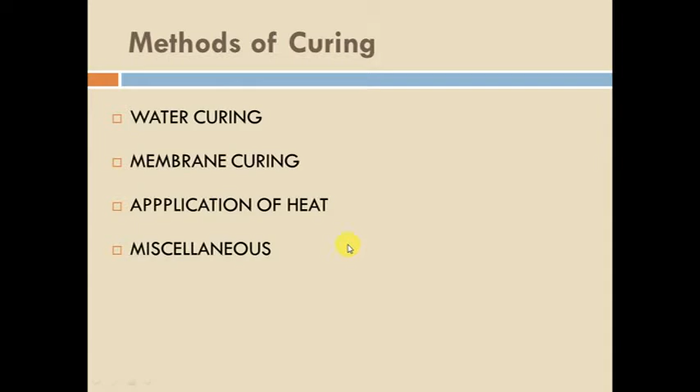Based on the required site condition, we can adopt these kinds of curing in order to get the complete hydration of cement. So first we'll go with water curing.

Water curing is one of the best methods of curing because it satisfies all the requirements like progressive hydration, maintaining the required temperature, and removing of shrinkage cracks or other cracks. Since it satisfies all these requirements - promotion of hydration, elimination of shrinkage cracks, and absorption of heat of hydration - water curing is the best method of curing.

Even if you are adopting membrane curing, before placing the membrane on top of the concrete surface, we have to do water curing also. Water curing is done initially, then on top of that, we cover the concrete with the membrane. So even if you adopt membrane curing, initially you have to do water curing, then you can do the membrane curing.

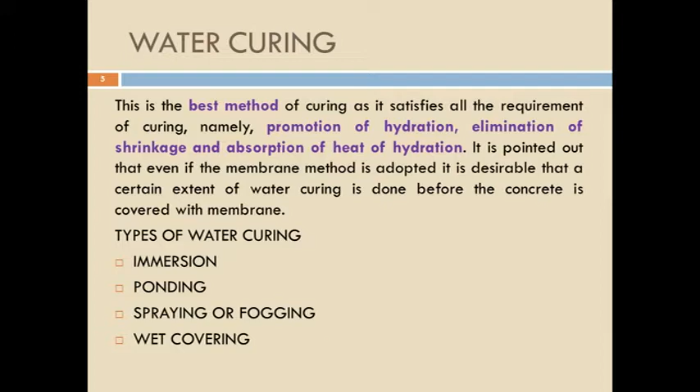These kinds of immersion tanks can be used for laboratory purposes. You can see these temporary or permanent immersion tanks in laboratories or in RMC plants, where we are placing precast concrete items and concrete cubes, beams, cylinders, etc.

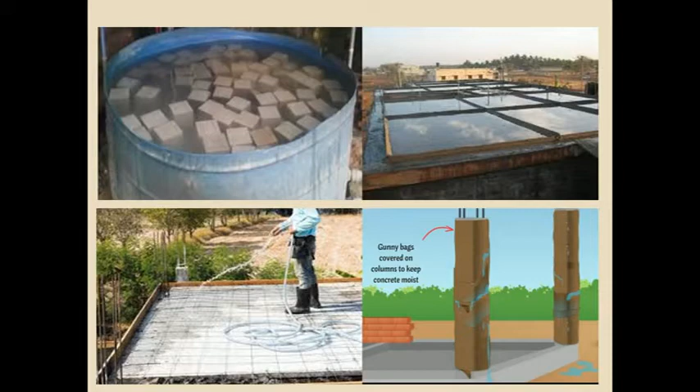Water curing of concrete.

Water curing is the best method of curing as it fulfills all the requirements of curing, such as hydration of cement, elimination of shrinkage, and absorption of the heat of hydration.

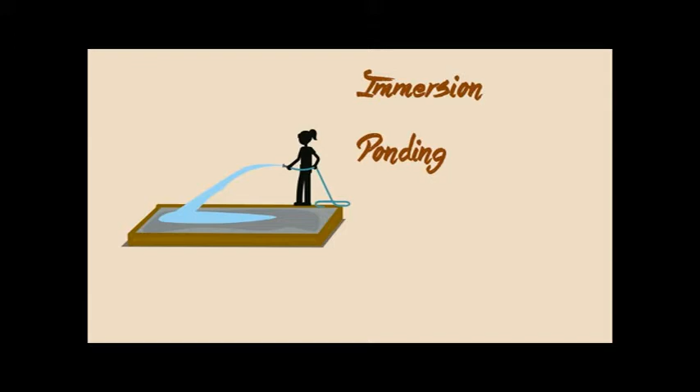Water curing is generally done in different ways, such as immersion, ponding, spraying or fogging, and wet covering. The type of water curing is adopted based on the requirements of concrete.

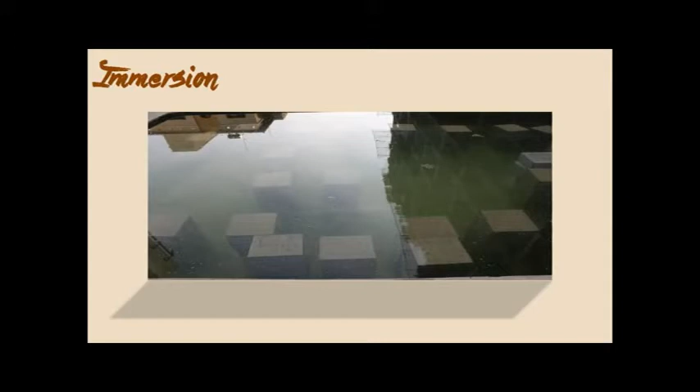Precast concrete items are typically immersed in curing tanks for a certain duration. Ponding is adopted for pavement slabs, roof slabs, etc. Spraying or fogging is done on vertical retaining walls, plastered surfaces, or concrete columns, etc.

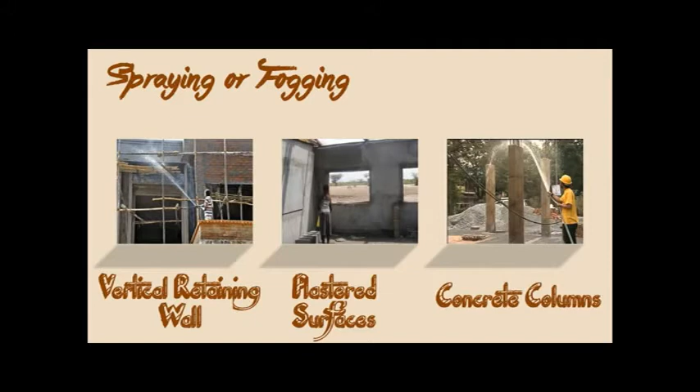In some cases, wet coverings such as wet gunny bags, hessian cloth, jute matting, straw, etc., are wrapped to a vertical surface for keeping the concrete wet. Apart from these, for horizontal surfaces, sawdust, earth or sand are also used as wet covering to keep the concrete in wet condition for a longer time so that the concrete is not unduly dried, to prevent dehydration.

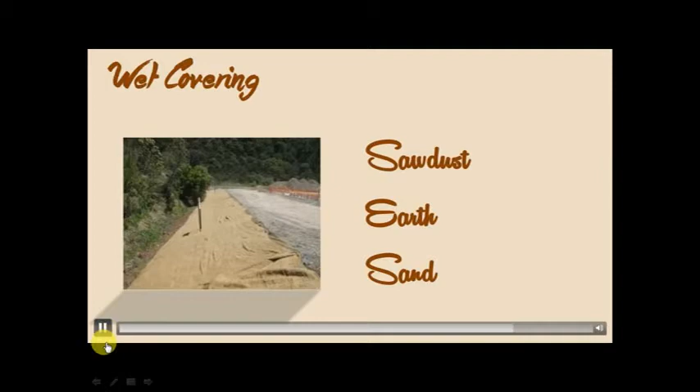These are all the methods adopted for water curing. I hope we understood about water curing and its different methods.

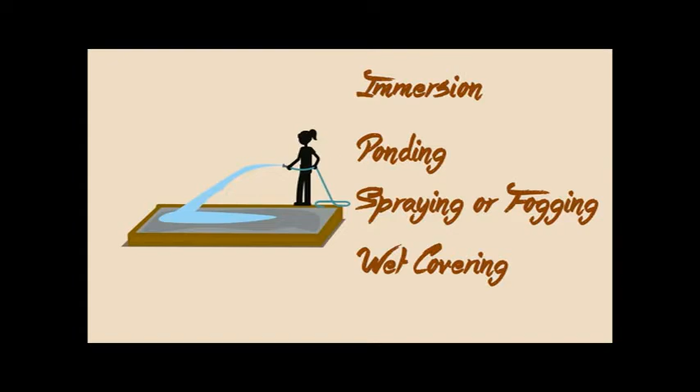Next we'll go into membrane curing. Membrane curing is usually done at a place where there is a shortage of water, or where curing is not possible due to the application of water. If there is any shortage where curing is not possible, in that case we can adopt membrane curing.

Curing is not only application of water to the concrete surface. There is a technical reason behind doing the curing. In order to create uninterrupted and progressive hydration, so that cement particles get completely hydrated, we have to do the curing process. We should not stop the curing process before the cement particles get hydrated.

Stopping curing too early leads to decrease in strength and durability. We should make sure there is no interruption in the hydration, and that hydration continues till all cement particles get hydrated. It is not only application of water - there is a technical reason behind this.

For this reason, concrete could be covered with a membrane, which will effectively seal off the evaporation from the concrete. This membrane is covered on top of the concrete surface so that it effectively stops the evaporation of water from the concrete.

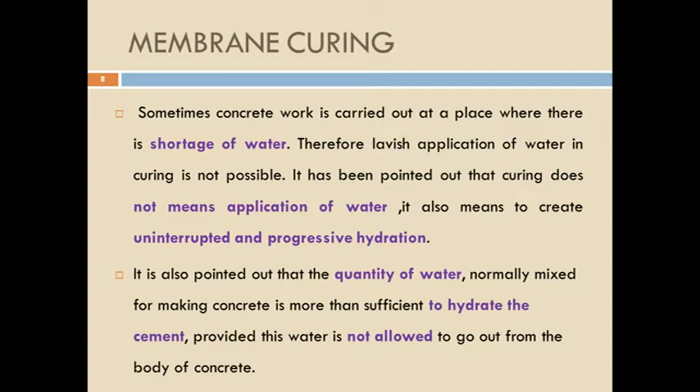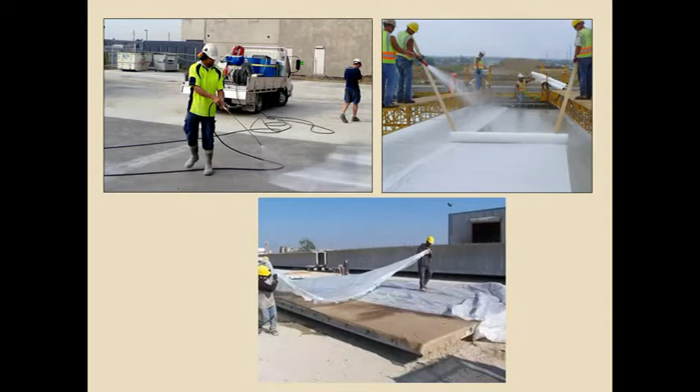Membrane curing of concrete.

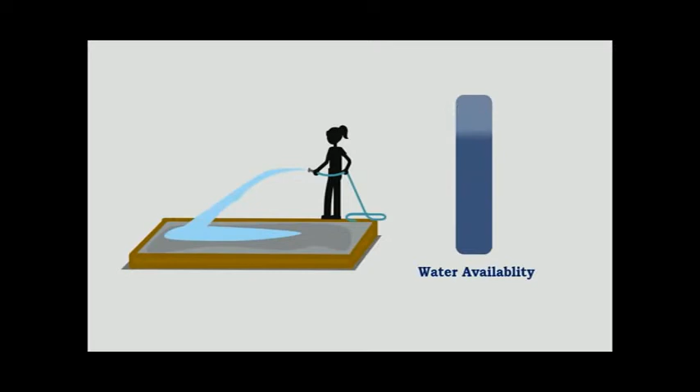In some places where there is an acute shortage of water, water curing may not be possible for reasons of economy.

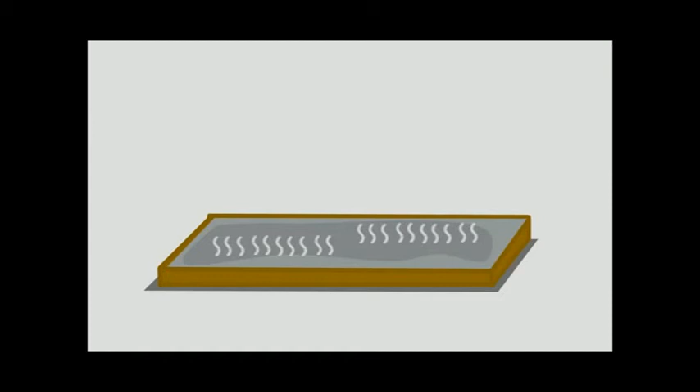We know that curing of concrete is done as water added in the concrete gets evaporated after being placed. If water curing is not possible, covering with a membrane will effectively seal off the evaporation of water from concrete. However, a small amount of water is sprayed before covering with the membrane.

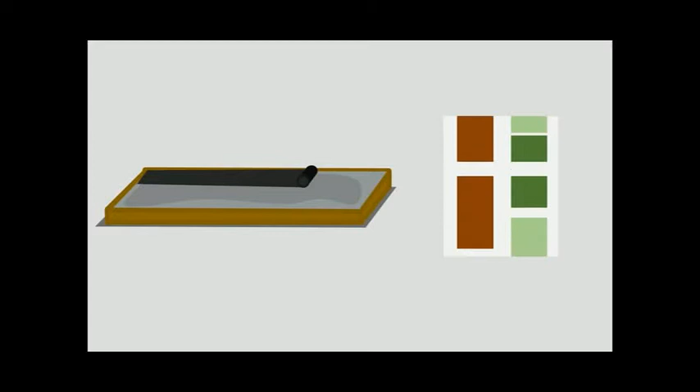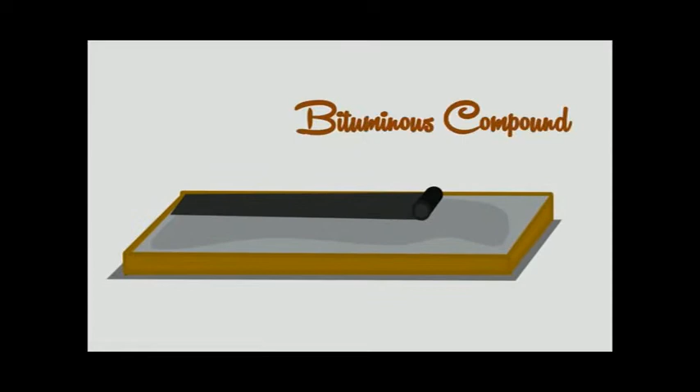There are a large number of sealing compounds developed in recent years. Some common materials used are bituminous compounds, polyethylene or polyester film, waterproof paper, rubber compounds, etc. Initially, bituminous compound was being used for this purpose.

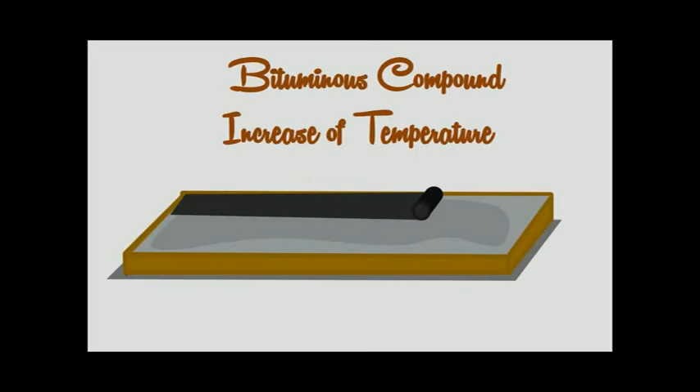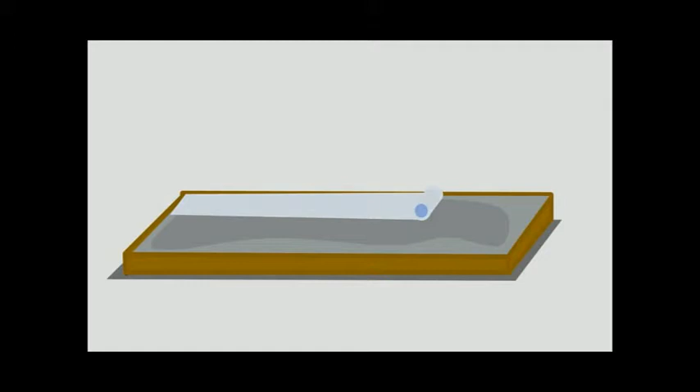As bituminous compound is black in color, it absorbs heat from the sun when applied to the top surface of the concrete. This results in an increase of temperature in the body of concrete, which is undesirable. Thus, other modified materials which are not black in color came into use. However, bituminous compound coated with lime is being used, as lime wash prevents heat absorption.

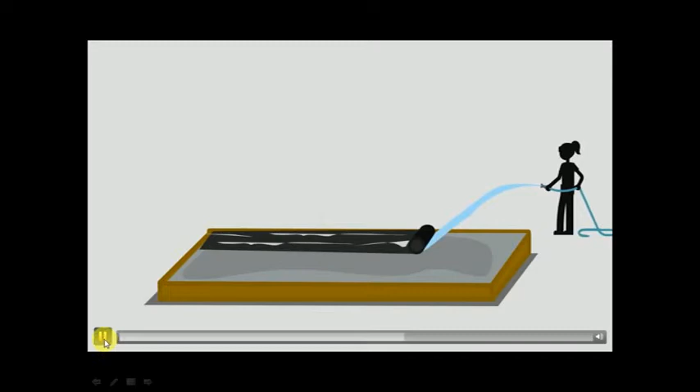To obtain best results, a small amount of water is sprayed before covering with the membrane. Normally, 2 or 3 coats may be required for effective sealing of the surface to prevent evaporation of water.

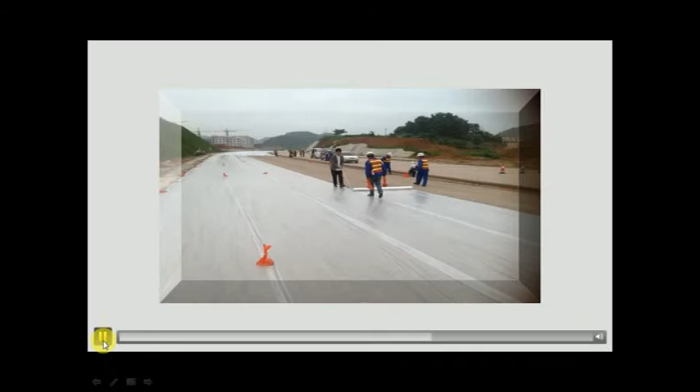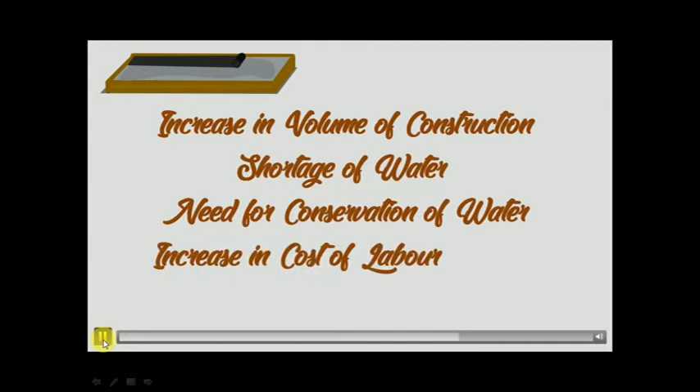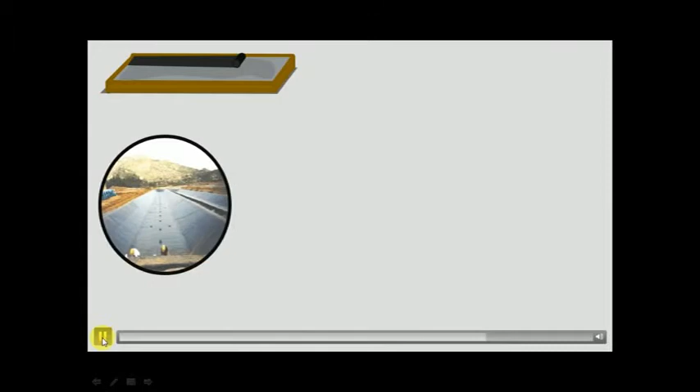The reason for large use of membrane curing is the increase in volume of construction, shortage of water, need for conservation of water, increase in cost of labor, and availability of effective curing compounds. Membrane curing is commonly preferred for curing canal lining, sloping roofs, and textured surfaces of concrete pavements.

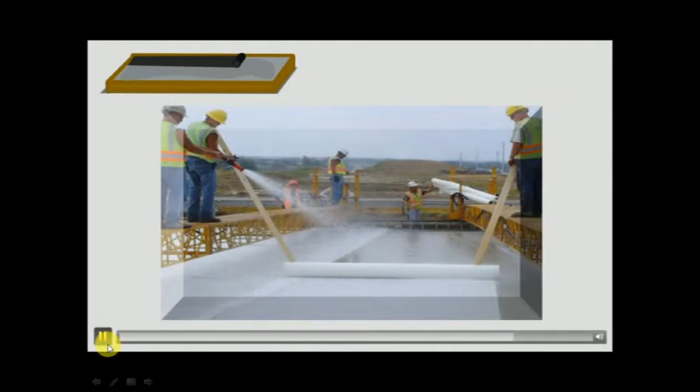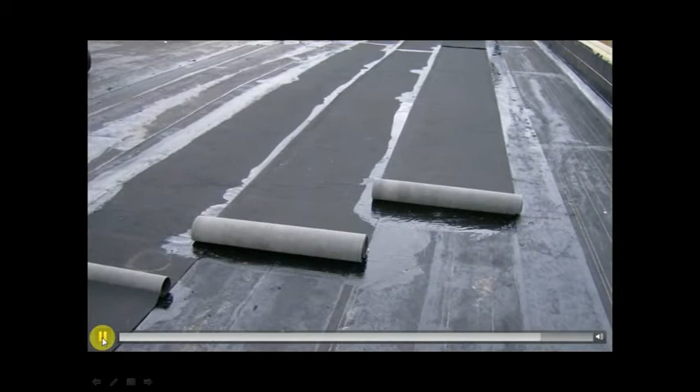In case of waterproofing, paper or polyethylene film are used as the membrane. Sufficient care must be taken to ensure there is no puncture. In membrane curing, it should be checked whether adequate lapping is given at the junctions and that these laps are effectively sealed.

I hope you understood about membrane curing. Next we'll go to the next type of curing, that is application of heat curing.

The development of strength not only depends on time but also on temperature. When concrete is subjected to high temperature, it accelerates the hydration process, which results in the development of strength. Concrete subjected to dry heat accelerates the hydration process, but the presence of moisture is also essential in the concrete. As you all know, the strength of concrete is not a function only of time but also of temperature.

When concrete is subjected to high temperature, the hydration process will be more. But when you give dry heat to the concrete, the moisture present in the concrete will be completely lost because of this dry heat. So when the concrete is subjected to high temperature or dry heat, the presence of moisture is also very much essential in the concrete - there should be moisture present along with high temperature.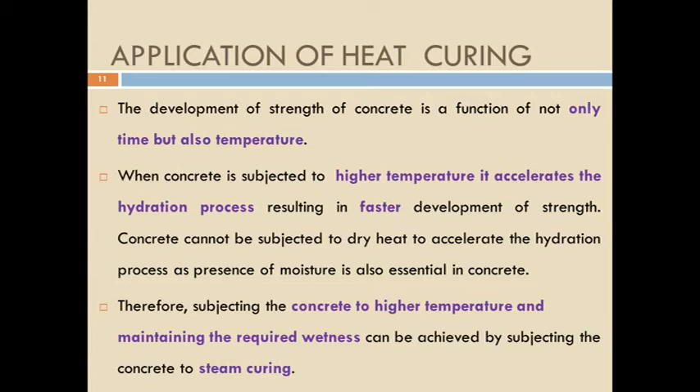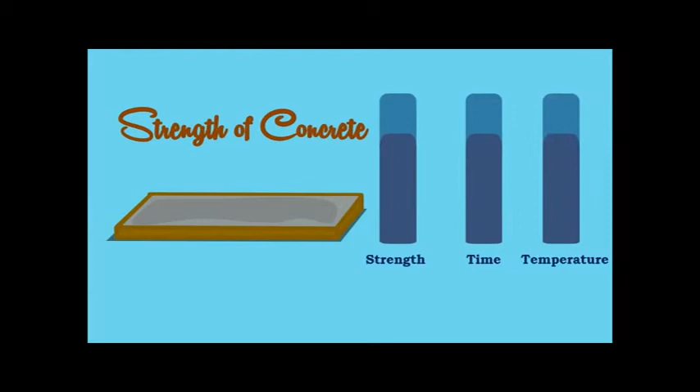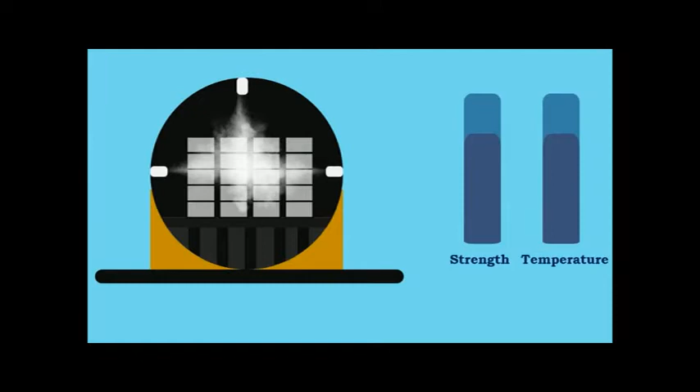Curing by application of heat. We all know that the development of strength of concrete depends not only on time but also on the temperature of the surroundings. Thus, when the concrete is subjected to a higher temperature, it accelerates the hydration process, resulting in faster gaining of strength. As the presence of moisture is essential, the concrete cannot be subjected to dry heat to accelerate the hydration process.

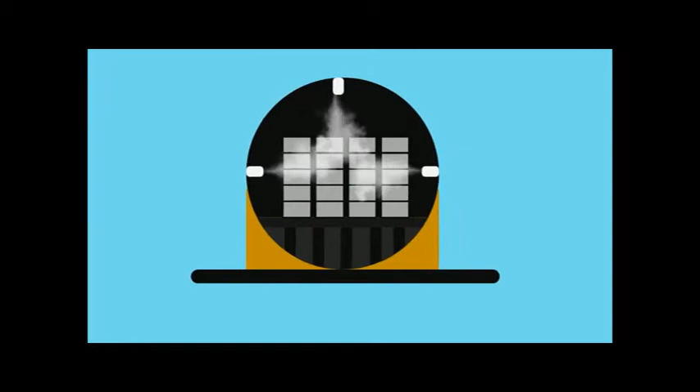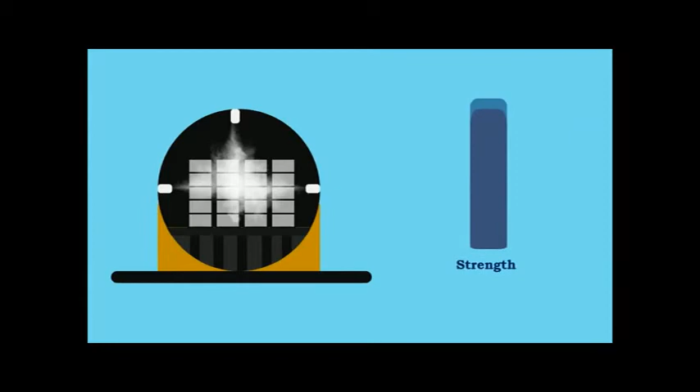Therefore, subjecting the concrete to higher temperature while maintaining the required wetness can be achieved by processes such as steam curing, infrared curing, or electrical curing. This method of curing makes the concrete attain strength faster, so it has many advantages such as accelerated setting time and reduced curing time. But this method is most commonly adopted in the curing of prefabricated elements.

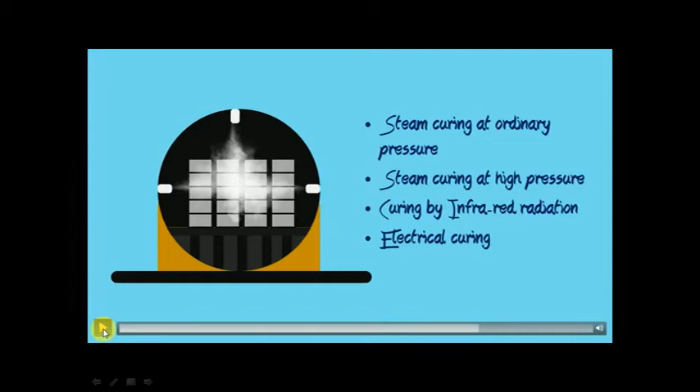The different methods of curing by application of heat are steam curing at ordinary pressure, and others. We'll study all these methods one by one. The types of steam curing are: steam curing at ordinary pressure, steam curing at high pressure, electrical curing, and curing by infrared radiation. So these are the four types.

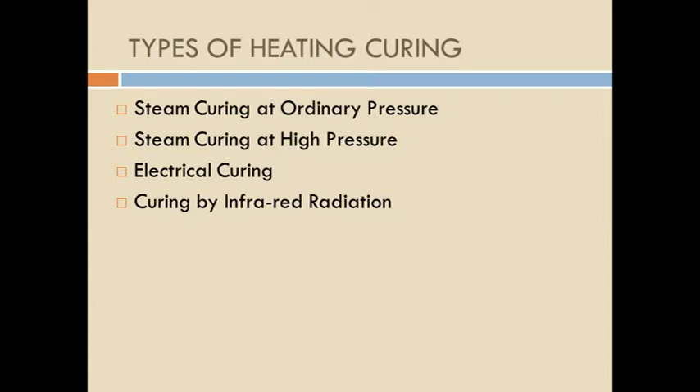Steam curing at ordinary pressure. This method is adopted mostly for prefabricated concrete elements. This kind of steam curing is very difficult to do on site. It has to be done by means of thick polyethylene sheets, but the rate of strength obtained is not beneficial.

In the concrete prefabricated industry, if you prepare beams or walls, since it is done in a maintained surrounding temperature, you can achieve good strength in the factories. In those cases, steam curing is quite economical compared to doing it on site. On site it becomes a very difficult task because it has to be done in a closed chamber.

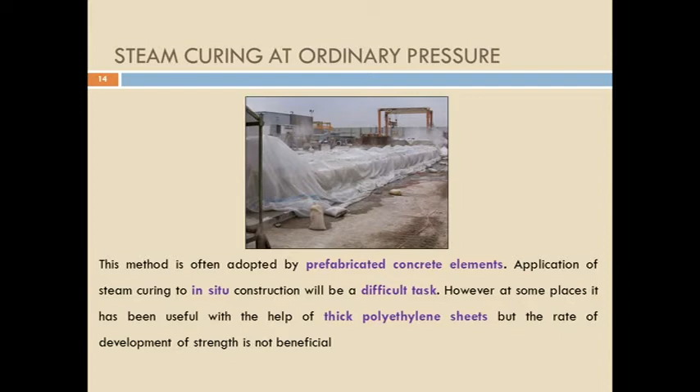If you do it in a closed chamber, the effectiveness of the steam curing will be more. If you do it outside in the open environment, the efficiency of the steam curing will not be good, and the rate of strength development will not be beneficial if you do steam curing on site. But if you do the steam curing in a closed chamber, especially in the prefabricated industry, then you can obtain the required amount of strength.

Steam curing at ordinary pressure is generally adopted for prefabricated concrete elements.

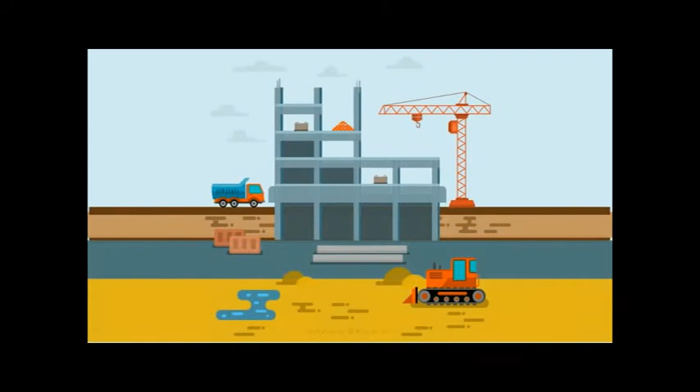The application of steam curing in construction site will be a little difficult task. However, steam curing at site is done by forming a steam jacket with the help of tarpaulin or thick polyethylene sheets. But it is found to be inefficient at site.

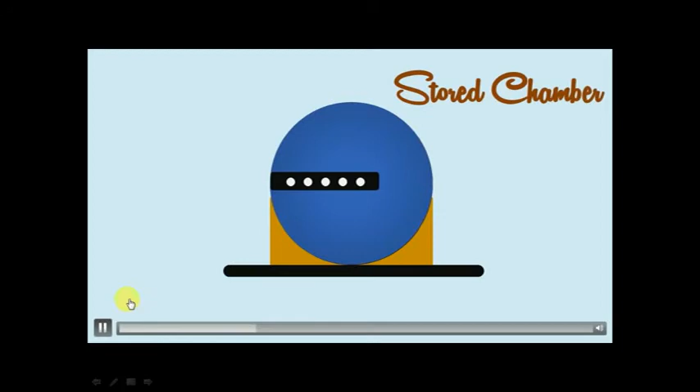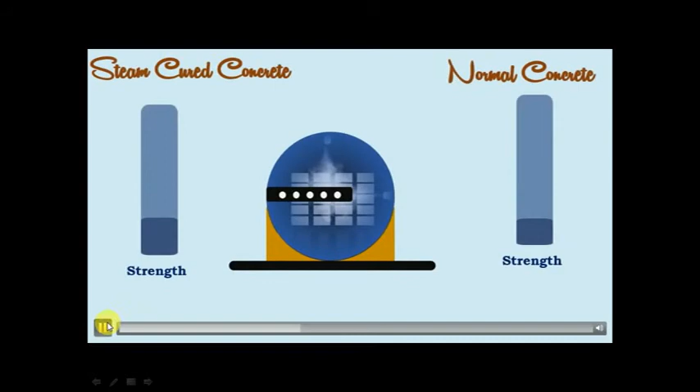Steam curing at ordinary pressure is done on prefabricated elements stored in a chamber. The chamber should be big enough to hold a day's production. The door is closed and steam is applied either continuously or intermittently. The accelerated hydration takes place at the higher temperature and the concrete products attain the 28 days strength of normal concrete in about 3 days.

So as I already told, the steam curing has to be done in a closed chamber. There should be sufficient amount of place, so that all the precast elements can be cured at a single stretch.

This is especially done in the prefabricated industry, where the quantity required of say electric poles or sleepers will be quite more. So you cannot do steam curing for every single sleeper. If you take it in a box chamber, that box chamber should be able to contain more number of concrete sleepers, that is railway sleepers, or concrete poles, so that at a single stretch steam curing can be done for more number of concrete elements.

So if you do the steam curing, whatever the required amount of strength that you used to get at 28 days, you will be able to get that strength by 3 days.

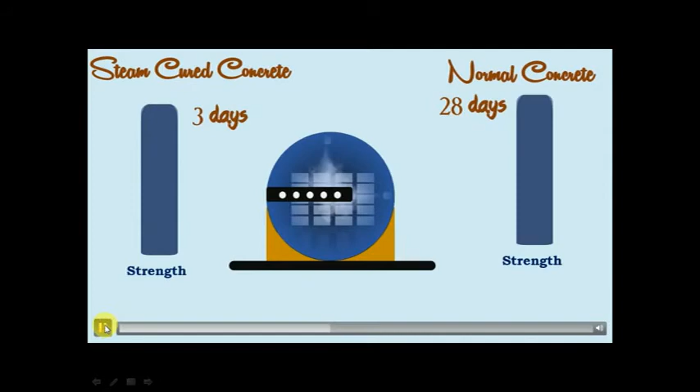In large prefabricated factories, they have a tunnel curing arrangement. This is a box chamber where more number of concrete elements can be placed inside, so that we can provide steam curing at a single stretch.

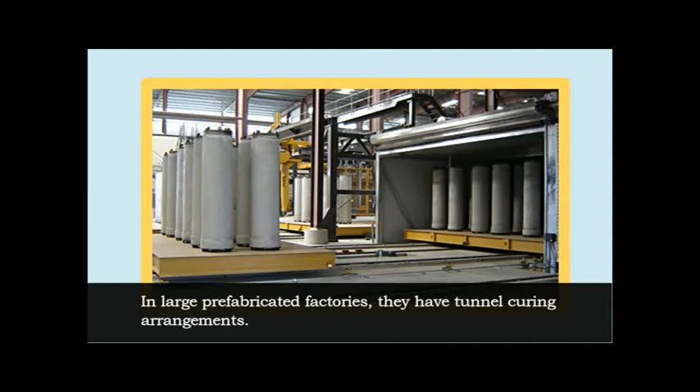Next we'll move on to high pressure steam curing. High pressure steam curing is something different compared to ordinary steam curing. In this, steam curing is also done in a closed chamber, but with superheated steam at high temperature and also at high pressure. In the first case there was high temperature but ordinary pressure. Here there is high temperature and high pressure steam curing.

Since it has both high temperature and high pressure, superheated steam will be developed at high temperature as well as high pressure. This process is called autoclaving. It is practiced in the curing of precast products in the factory, especially for lightweight concrete products.

Whatever strength we get at 28 days through ordinary curing, because of high pressure steam curing we can get that strength in 1 day or less than 1 day. High pressure steam curing gives good resistance to sulfate attack as well as chemical action, and it also resists shrinkage cracks present in the concrete. Compared to ordinary pressure, high pressure and high temperature curing can be used for prefabricated elements.

In this high pressure steam curing, we have studied about ordinary pressure steam curing, that is, in steam curing at atmospheric pressure, the temperature naturally is around 100 degree centigrade. In this kind of steam curing at ordinary pressure, the steam gets converted into water. In this way it can also be called hot water curing, and this can be done in open atmosphere.

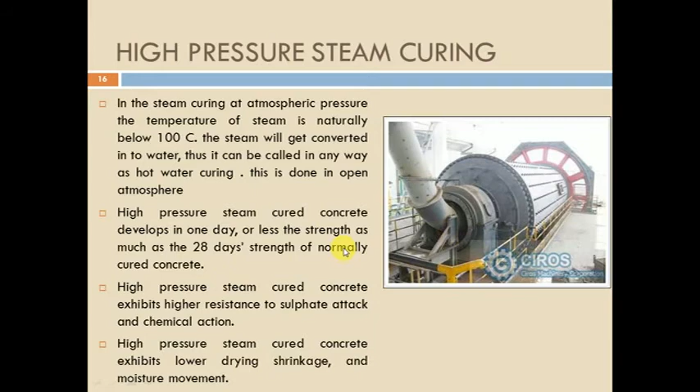Steam curing of concrete at high pressure is carried out in a closed chamber. The precast elements are placed in the chamber under superheated steam at high pressure and high temperature. This process is also called autoclaving, and it is done for curing precast concrete products in factories. Most probably, lightweight concrete products are cured by this method.

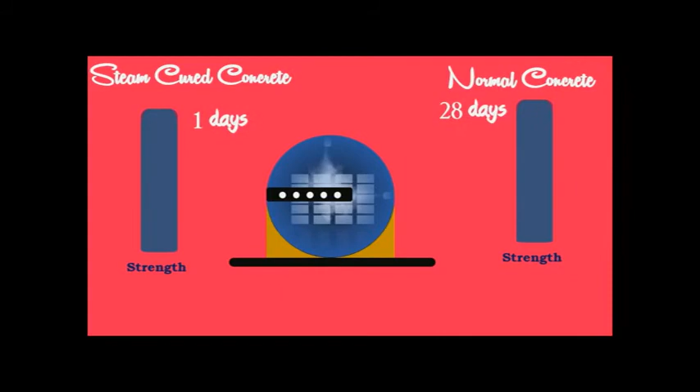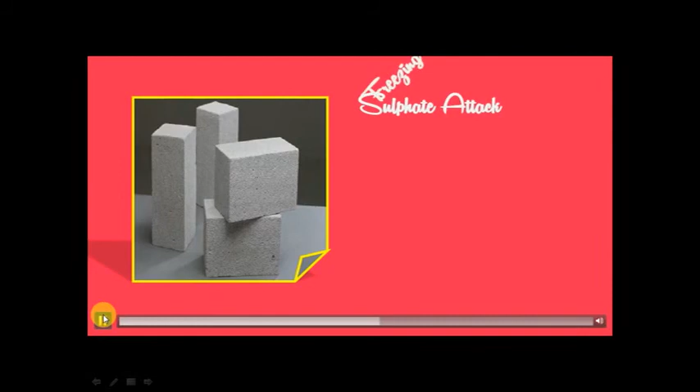The advantages of high-pressure steam curing are: the concrete can be cured in 1 day or less to obtain 28 days strength of normal concrete. Concrete cured this way exhibits higher resistance to sulfate attack, freezing and thawing action, and chemical action. It also exhibits lower drying shrinkage and moisture movement.

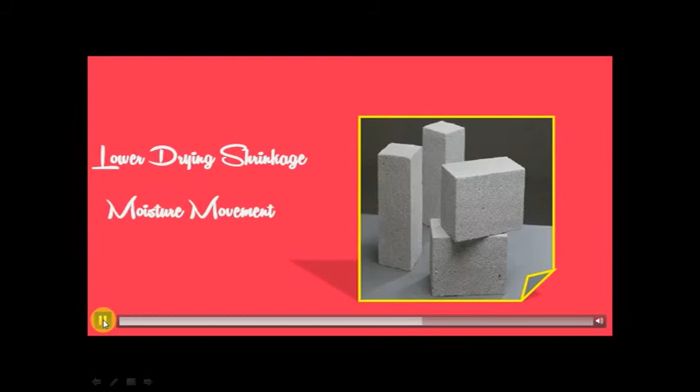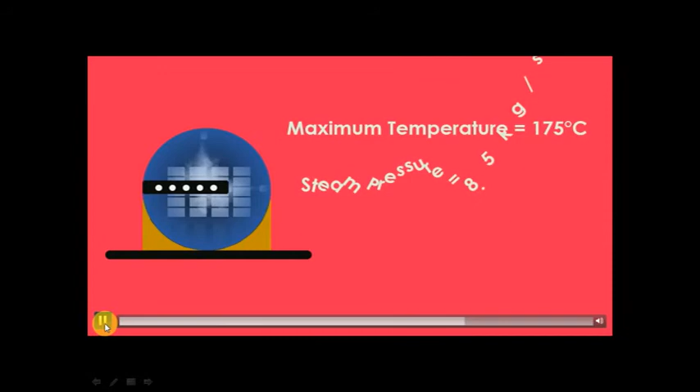In high-pressure steam curing, the concrete is subjected to a maximum temperature of 175 degrees Celsius, corresponding to a steam pressure of about 8.5 kilograms per square cm. High-pressure steam-cured concrete is somewhat brittle and whitish in color.

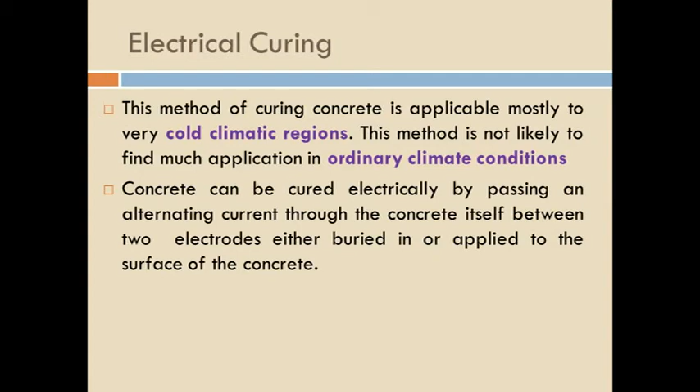So it is called electrical curing. Concrete can be cured by passing an electric current through the concrete between electrodes applied to the surface of the concrete. This is how electrical curing is done. We must make sure that the required amount of moisture is prevented from escaping the surface during electric curing.

Electrical curing of concrete.

Electrical curing of concrete is widely adopted in very cold climatic regions. Besides, usage of this method in ordinary climatic conditions is found to be uneconomic. In this method, the concrete is cured by passing an alternating current through the concrete between two electrodes in the form of plates placed over the entire area on opposite sides. The potential difference between the plates is maintained at 30 volts or 60 volts. Sufficient care must be taken to prevent the complete escape of moisture from the concrete.

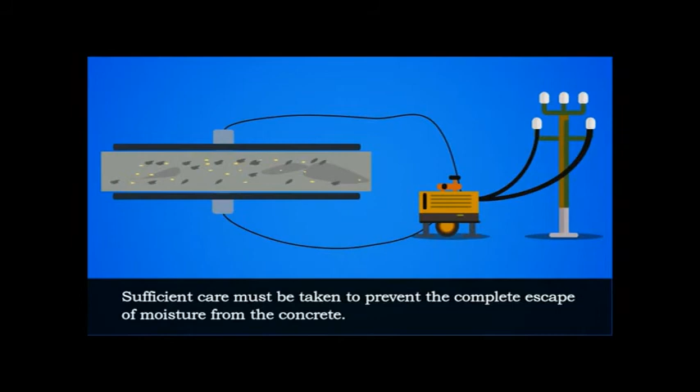By the electrical curing method, the concrete can attain the normal 28 days strength in a period of 3 days. However, this method is rarely adopted as it is expensive.

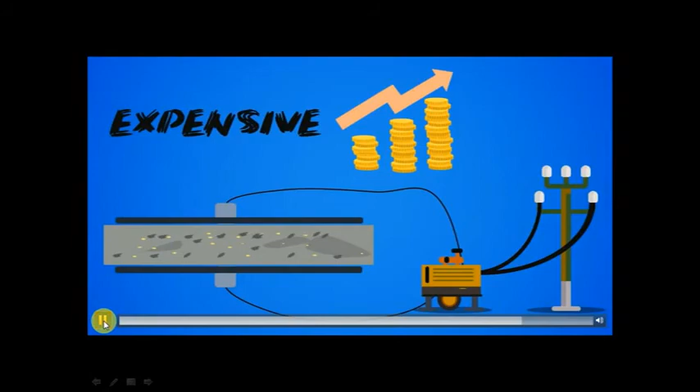That is regarding curing by electrical current. Next, curing by infrared radiation. This kind of curing is practiced in cool climatic regions because it is quite helpful there, whereas it is not normally used in other regions due to economic issues and expense. This curing can be done for hollow concrete products, where there is a hollow spacing on the concrete blocks, called hollow concrete blocks, using an operating temperature of around 90 degrees centigrade. Curing is done by means of infrared radiation.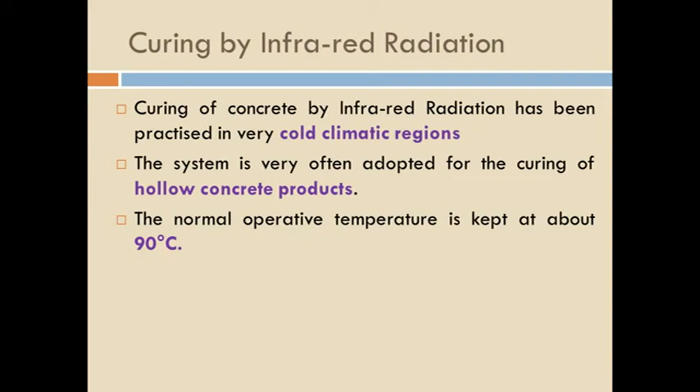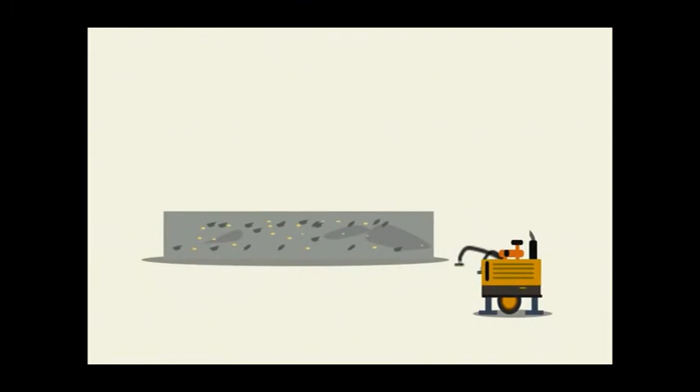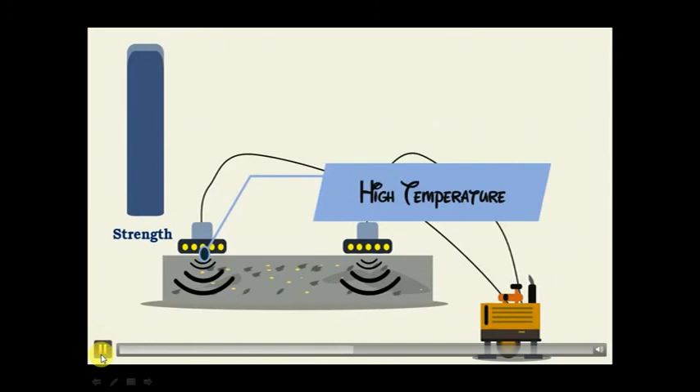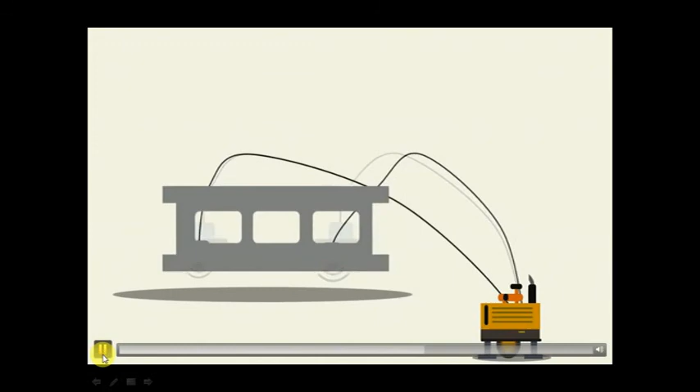Curing of concrete by infrared radiation is generally done by the application of infrared to the concrete. In this method, the strength of concrete can be gained faster than in steam curing methods. The initial high temperature given to the concrete does not cause any decrease in the ultimate strength. This method of curing is commonly adopted for hollow concrete products, where the heaters are placed in the hollow space presented in the concrete products.

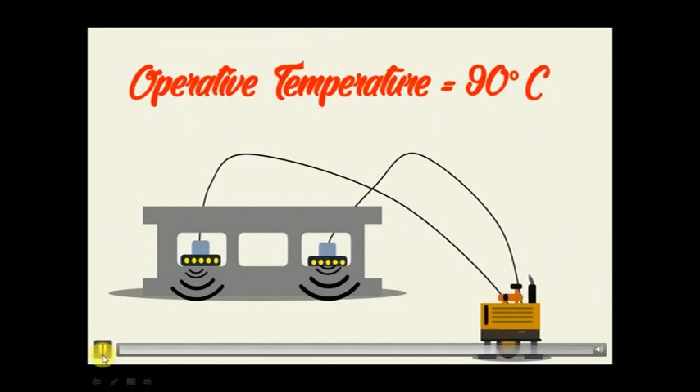The normal operative temperature of this method is about 90 degrees Celsius. So that is regarding the curing by infrared radiations.

So thus we have completed the methods of curing. We have studied about water curing, membrane curing, and the applications by heat.

Next we'll go on to the important topic, that is the duration of curing. What is the amount of duration that we have to do the curing process, and normally what number of days we have to do the curing. So we'll study on that.

Concrete should not be allowed to dry in any of the conditions. Concrete should be sufficiently moist, it should not be kept dry. If it is kept dry, then the strength and durability will be affected. So concrete should not be allowed to dry in any of the conditions.

Once the shuttering is removed, once the formwork is removed, we have to do the curing for 24 hours by means of gunny bags. Then we can commence the water curing by ponding or by sprinkling method. That is the best practice.

Next, concrete can be cured for a longer time. If you do the concrete curing for a longer time, it increases the strength and durability of the concrete members.

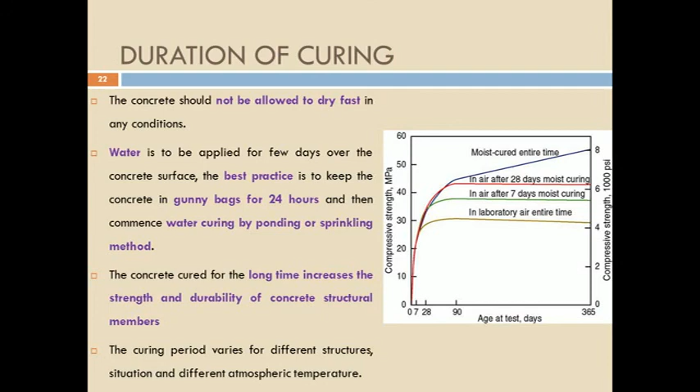So the curing period varies for different situations, different structures, and also different atmospheric conditions. Early strength of concrete is more important and is responsible for the ultimate strength of concrete. Whatever strength we obtain at 3 to 7 days, because 60% of the strength will be obtained around 3 to 7 days.

So the early strength is more important so that we can know what will be the ultimate strength of the concrete. Whatever strength we get at 3 to 7 days is very important because it gives around 50 to 60% of the ultimate strength.

The temperature that we use to maintain in the concrete surface during curing should not be cooler than 5 degrees centigrade. It should be more than 5 degrees centigrade.

And the minimum period that we use for curing concrete to attain maximum strength is 28 days. As I already told, 90% of the strength will be obtained at 28 days. So the minimum period for curing concrete to get maximum strength is 28 days.

But due to the lack of time nowadays, faster construction has to be done. Due to the improvement of technology in the construction industry and modern techniques, we can get the required strength around 14 to 20 days. Whatever strength we used to get in 28 days, with modern techniques we can achieve in 14 to 20 days. But the minimum time recommended to keep the concrete moist is around at least 14 days.